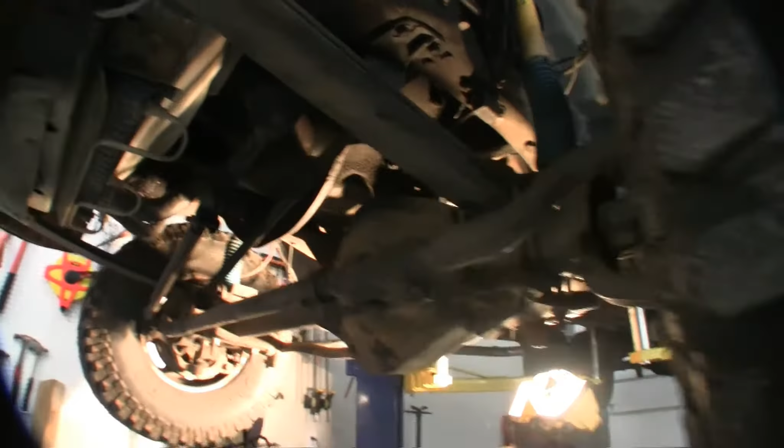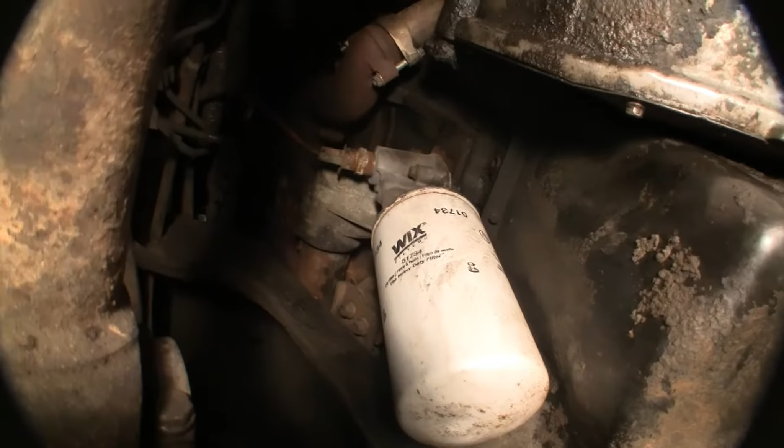I'm going to be changing out the oil cooler. Let's go around this way so we can see what we're doing. Get right up underneath here, and there is the end of your oil cooler. It comes in just above the engine block heater right here.

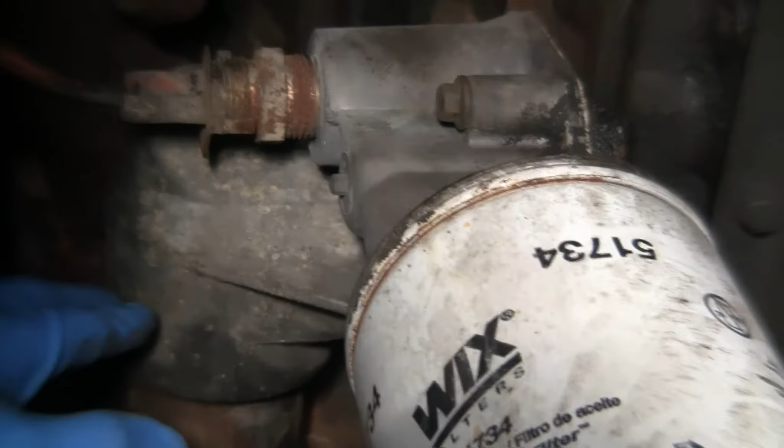Obviously, big old oil filter. I'm not going to change the oil today, it's just been done recently, so it's the same oil, but I'll take the filter off to get to it. This is the back end, the rear part of your oil cooler. Oil cooler is right here, all right? This thing's got about almost 200,000 miles on it, and I'm fairly certain it has never been changed.

If you go through the manual, the Ford manual, there is a way to test that for flow, see if there's any flow problems. But everything I've read about it, it definitely has flow problems by now, almost 200,000 miles. The small holes in there start to get occluded and kind of gummed up. It doesn't cool the oil properly.

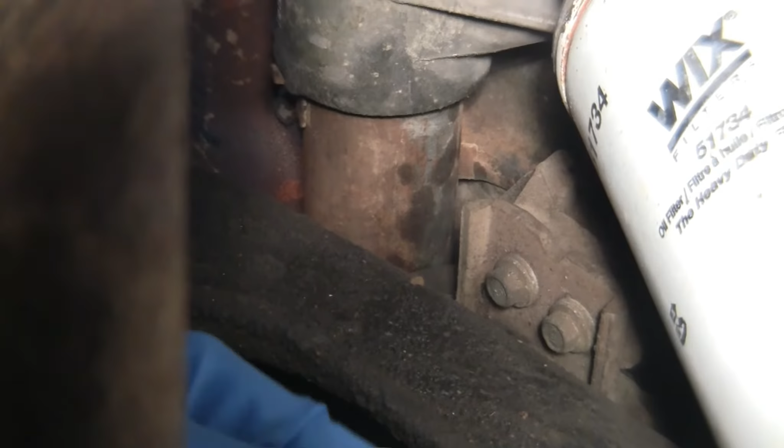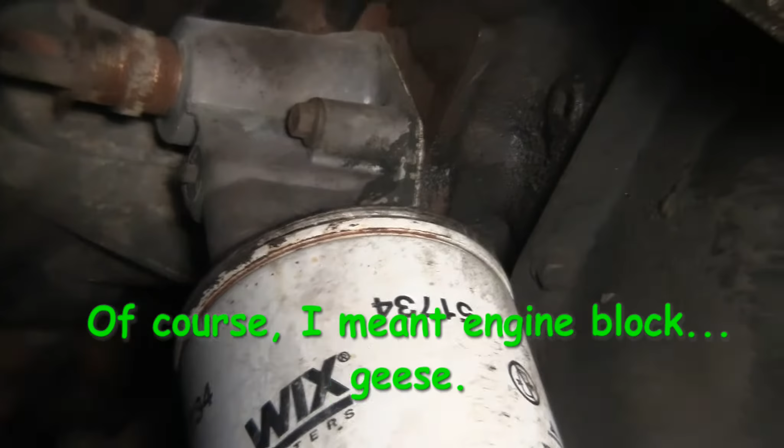You're going to have to take off here the connector for the oil filter. Right here behind the oil filter is your plug for your cylinder drain, to drain your engine block right there for your coolant. There's another one on the other side from where I am, and I'll show you.

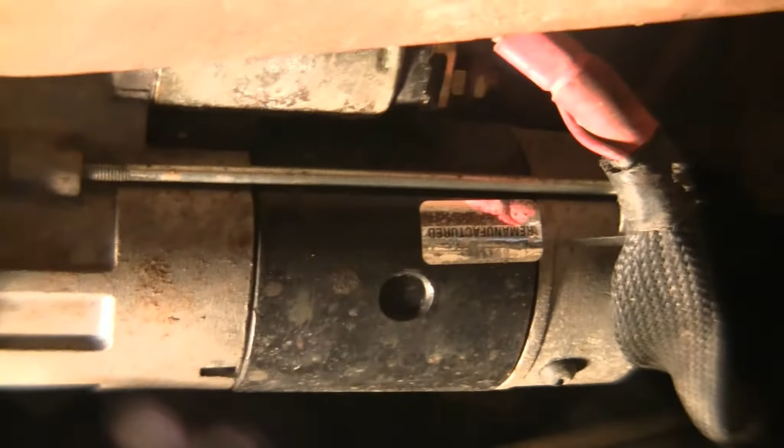Come around to this side of the car, and you can see here where the starter is up underneath here. The other, the passenger side drain plug is just up and above the starter. I think you can reach it if you come over the top.

I've already got it up on the lift, so I'm just going to leave it. I've seen several people online who did this by only draining the engine block on the driver's side and then taking it off. The Ford manual recommends that you come up here.

It's more towards the front part of the truck here. And if you can see this, you've got a drain plug. Whoops, sorry, it's kind of right behind that, isn't it? Let's come around here a little bit. You've got a drain plug right here for your radiator.

Ford recommends draining the whole thing. It's been a while since I've changed the coolant in this truck, so I'm going to go ahead and drain all the coolant, toss it, and refill it. By draining there in the back, on the engine block, there should be enough coolant out of the way to be able to do this without any problems.

Now the Ford manual makes this thing sound easy. It just says unhook the back, unhook the front, pull it off, put a new one back on. You can probably do this in maybe 30 minutes if you really get everything together and come and do it.

A couple of things. Go back around here to the front, let me show you. I do mention this later on in the video, but go ahead and take this lower hose off here. It makes it so much easier. Pop that and off you come.

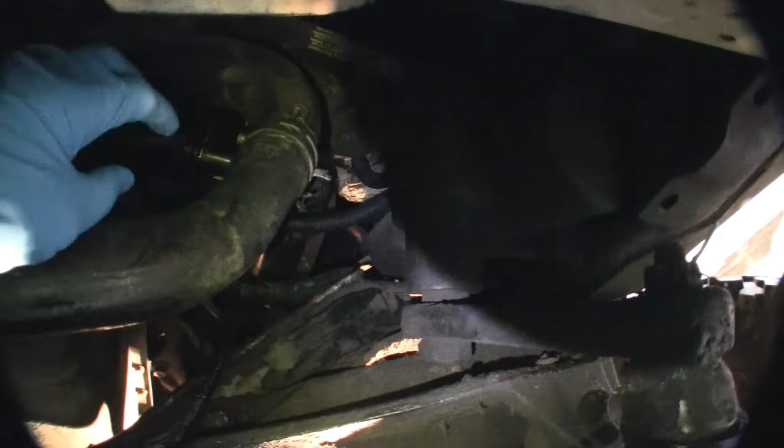Now this bolt is the key to getting it back on. Make that the last bolt you take off. Okay, you have a lot more trouble getting the top bolt out. It kind of gets a kink, sort of gets cockeyed, and it kind of splints against the bolt, makes it hard to get it out on the top. So take your top one out first.

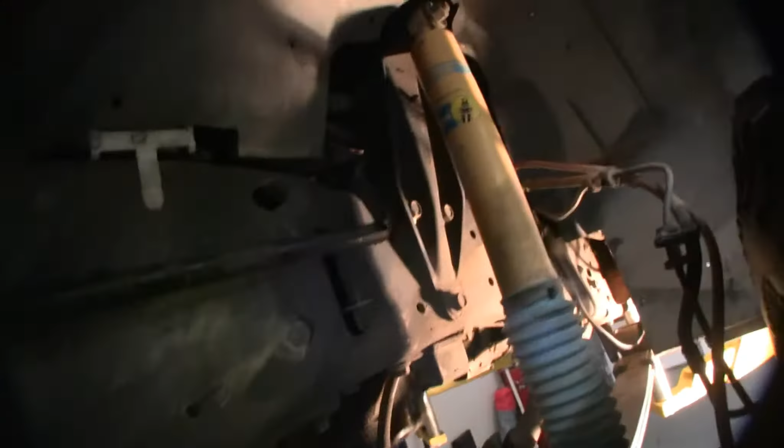The other thing is, go through, look on the other side, go through right here, get your top bolt. So much easier. You need a long extension, but it'll save you tons of time. Just go right through there, bam, it's right off.

Okay, the other thing, once you have your oil cooler out and you're working on it on the table like we were over here, you'll see on the video I use this for putting the oil cooler back together. I did one thing first that did not work.

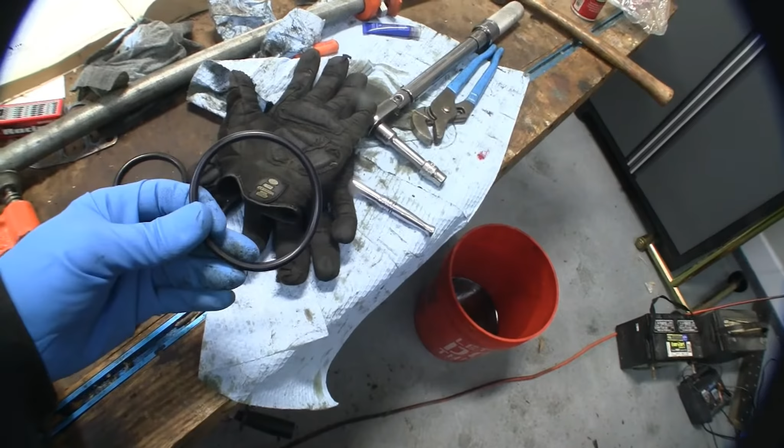Do not put the smaller black O-rings inside first. I tried putting those inside of the ends, sliding the oil cooler in on top of them with the large green ones already on the cooler. It doesn't work. They catch and they just won't slide for whatever reason.

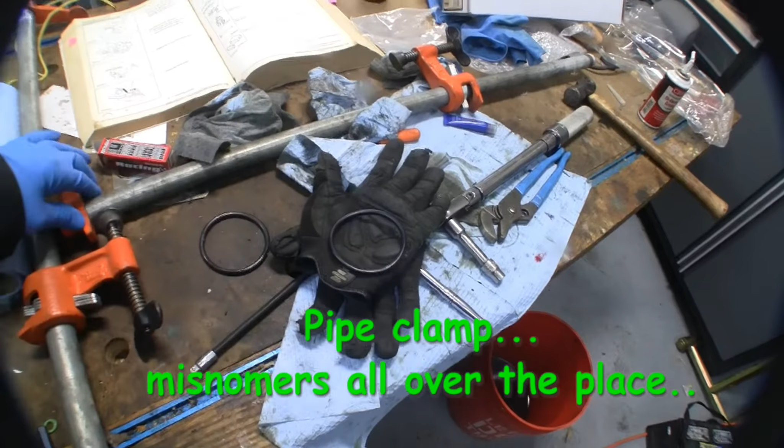Put both of these onto the oil cooler itself and then slide them in. It still takes quite a bit of pressure. I found that using a pipe clamp like this slid right together, no worries. I think that's about it. You do those couple of things and I think you'll see it go a lot quicker and a lot smoother.

Here's a quick picture of the shop manual I'm using, straight from Ford. I also have it on disc, but I've got this out here today. I'd recommend anytime you're working on a car, go online and check out what everybody else has done too, and take information from that. YouTube is a great place, obviously where you're looking today. But I'd recommend, if you can, get a hold of the actual manuals from the manufacturer. This is a Ford shop manual, a little bit used, a little bit older. Again, a good eBay buy here too.

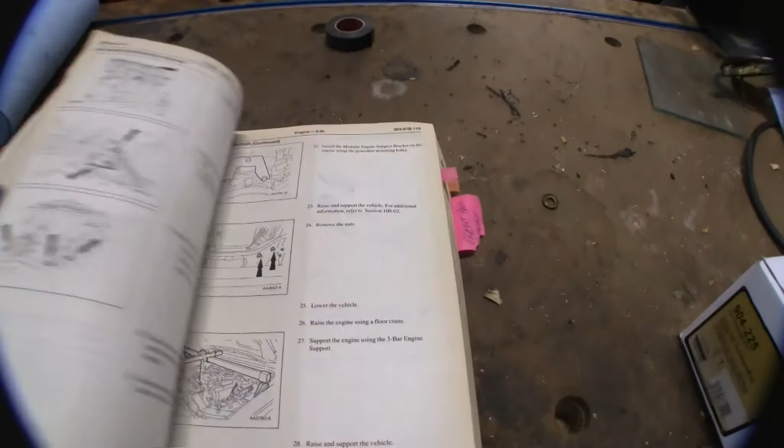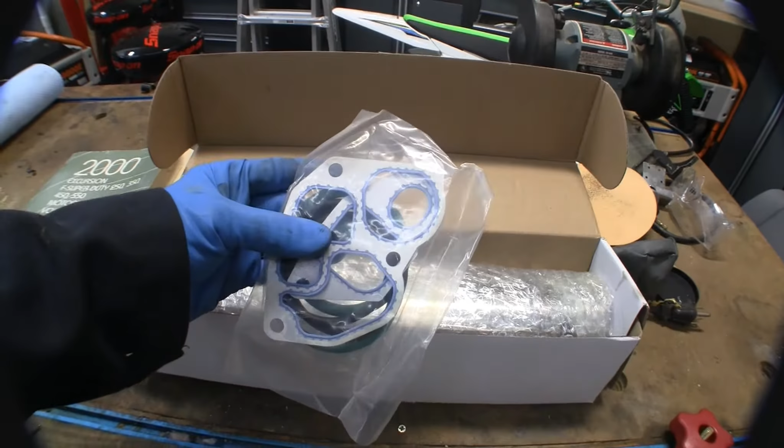We're going to open up and go to the oil cooler on this. Here's the parts we're going to be putting on today. This is a kit that I got from Rock Auto. You've got your new seals, you've got your new gaskets, right here. Then you have the oil cooler itself. I'm just opening this thing up, I haven't even taken it apart yet.

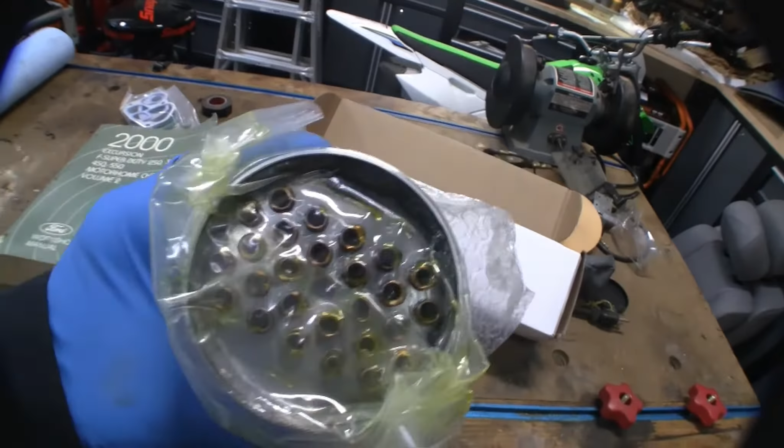Here's your oil cooler, and here's why you have trouble with it. Look down in there, my oil cooler has got almost 200,000 miles on it, never been changed. So I'm guessing some of those holes are not quite as patent as they used to be. I think I mentioned this before, there's a process in here for checking your current one - pull it off and do a pressure test on it. At 200,000 miles, I don't see any reason to do that. I'm just going to replace it. I've already got to take it off anyway. So this is what we're going to be looking at.

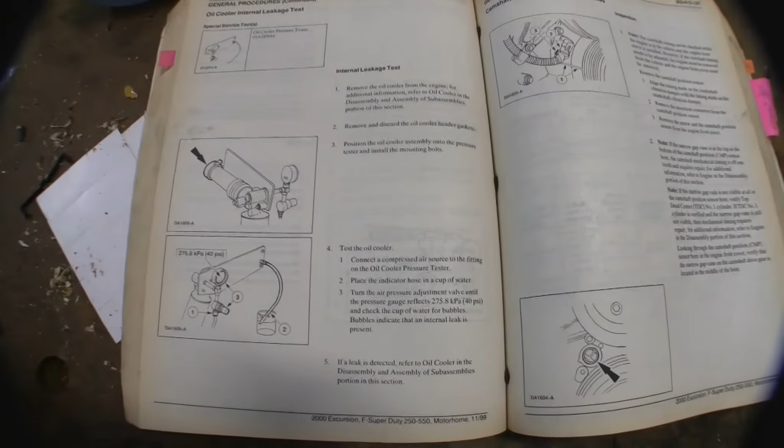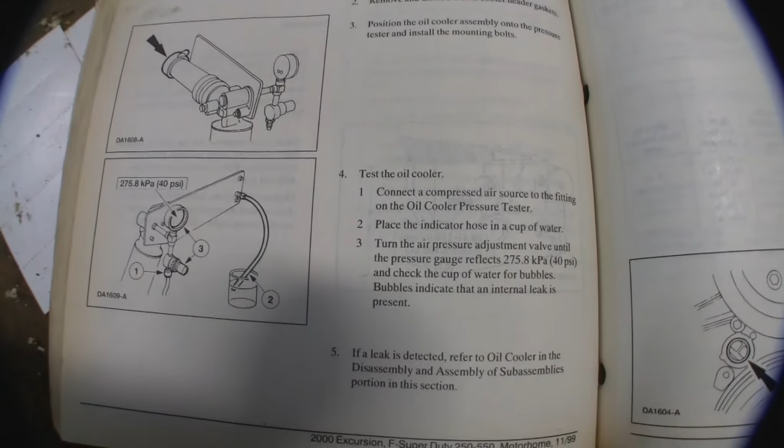Let's see if you guys can see that. It's kind of hard. Any of you who want to do the internal leakage test on your oil cooler, I'm not going to go through it, but there's how it's done. You're going to freeze frame that and read it. It's pretty short instructions on how to do it and how to check it.

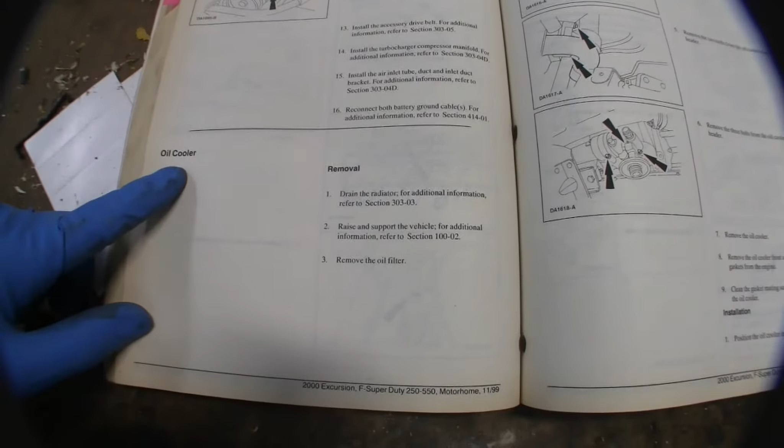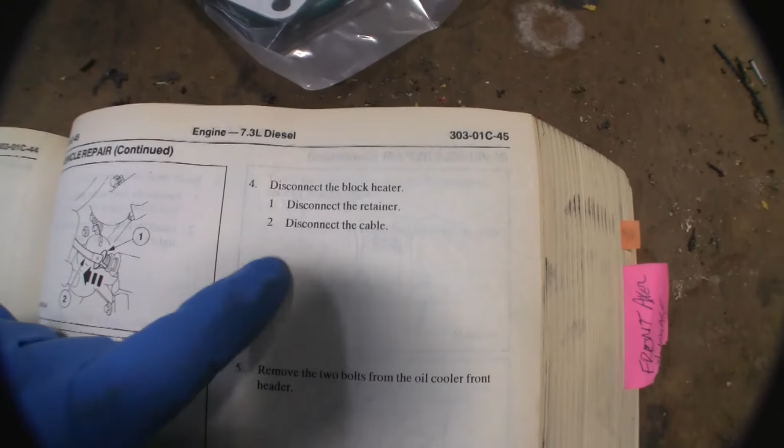So here's what the manual has to say about it. See the oil cooler up here. Hopefully it's as simple as they make it out to be. Drain. All right, what does it say? Take out the block heater, undo the bolts, and off it comes. It's never that easy. So we'll get in here and see if we can get this thing off, but it's never that easy. And then you install it.

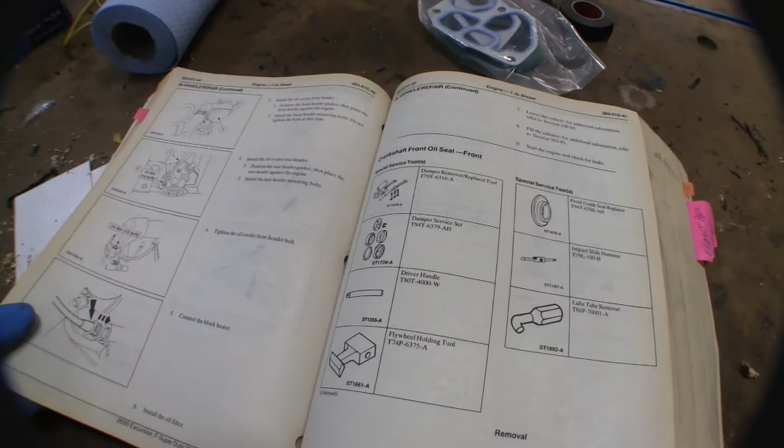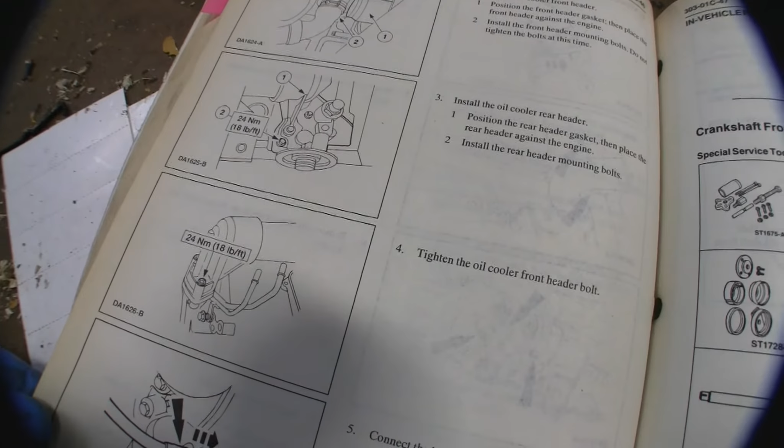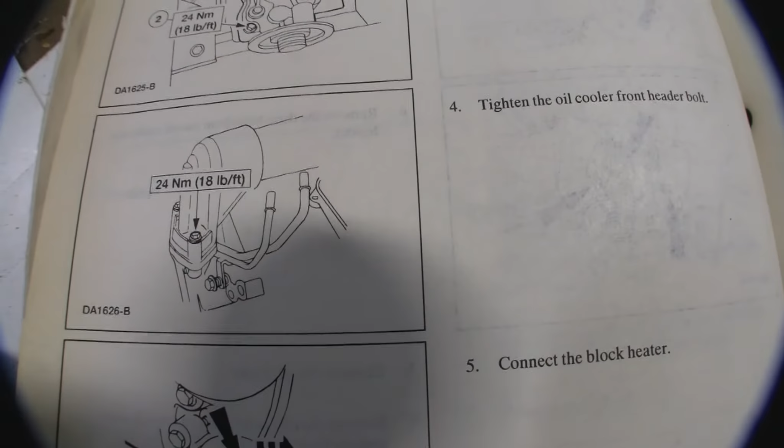I'm going to give you guys the torques here, the tightening torques for the rear header of the oil cooler that also contains the oil filter. Right there you can see is 24 Newton meters, just while we're at it. 24 Newton meters on the front as well, for your tightening torques for those bolts.

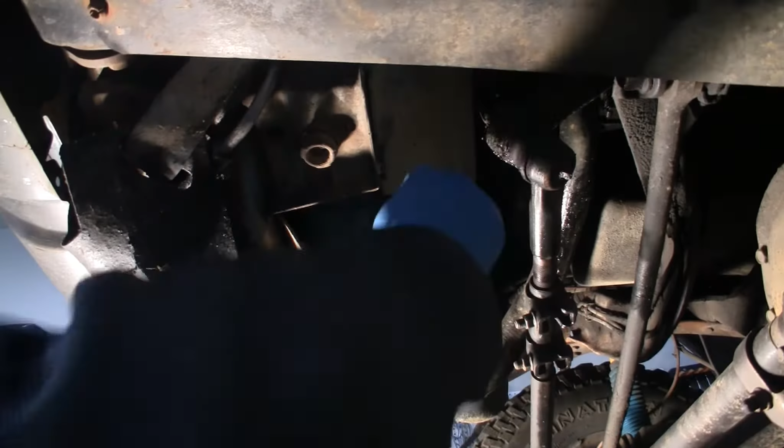So we're underneath the driver's side front. This is your drain for your radiator right here. I'm going to take the fluid out. 19 millimeter wrench, fits it perfectly. All right, and we just do a little loosening them up in here. I got a 5-gallon bucket ready to go down here. And we're just going to get some radiator fluid, get some coolant out of here. How about it? Oh, how about that? I guess we're going to be replacing our coolant drain plug. That's a fine how do you do. How about that?

Huh, well, it's got an internal - see that? Wait, where? It's got an internal on it. This is just to show you sometimes things don't go the way you want them to go. It's been on there way too many years, I'm guessing. I haven't drained it in years, and it looks like it didn't want to work with me.

So I'm going to get a hex to go in the center of that, and we'll fix it up. Okay, see if we can get this up in here. Here we go, so my little plug broke off. An 8 millimeter hex does fit into it, so we're going to use that to get the plug undone. And I'll just go back later and replace the plug. Honestly, the fluid doesn't look too bad, it looks pretty clean. But I'm still going to go ahead and replace it since I'm at it anyway.

There's a few things that you can do. Let's see if this works for us. Alrighty, let that drain for a bit, and we'll move on.

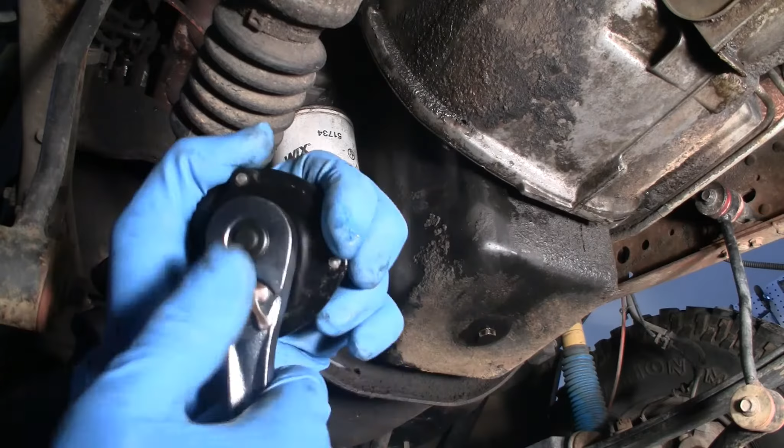Alright, so get hold of the oil filter and get it off. Right here, can you see this little bad boy? There he is. Great little tool, let me show you. Okay, just fixed into a 3/8 ratchet. Alright, great way to get them off. This is about the biggest oil filter this thing will fit, but great little gizmo here. Be sure that you're not twisting so hard that you put any dents into it, okay?

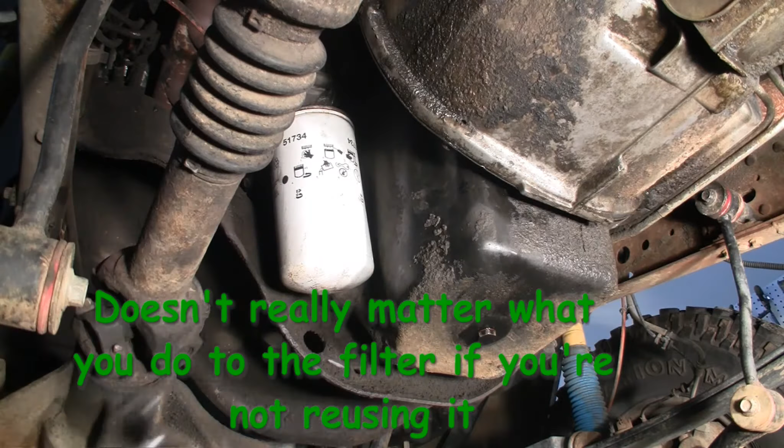Scraping a little paint here on the edges, no big deal. Just don't dent it. Try to get it off.

I've had a little change of heart here. They didn't say that you had to actually change all the oil, just top it off after you pull the filter off and put it back on. But my oil coming out of there looks like crap, so I'm going to go ahead, and while we're messing with this, I'm just going to change it all out.

You can see it's a pretty dark color, even though it hasn't been that long. I am a little rough on it, maybe that's what's happened to it. So I'm going to go ahead and make this an oil change as well, and we'll worry about that a little later on. But see the color of the oil, if that comes out like that, you might want to go ahead and just say, hey, time to change them out.

Alrighty, just spin it off. I like wearing these rubber gloves when I'm doing this kind of work as opposed to my leather gloves. I've got some other gloves that are made for working with oils and solvents and things like that, but these cheap throwaways actually tend to work better than just about anything.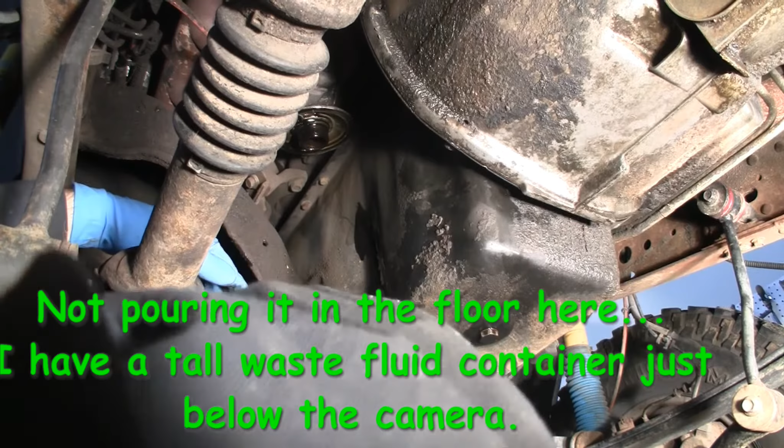Yeah, that oil's coming out looking pretty darn nasty. So I'm going to go with an oil change on this bad boy. Alright.

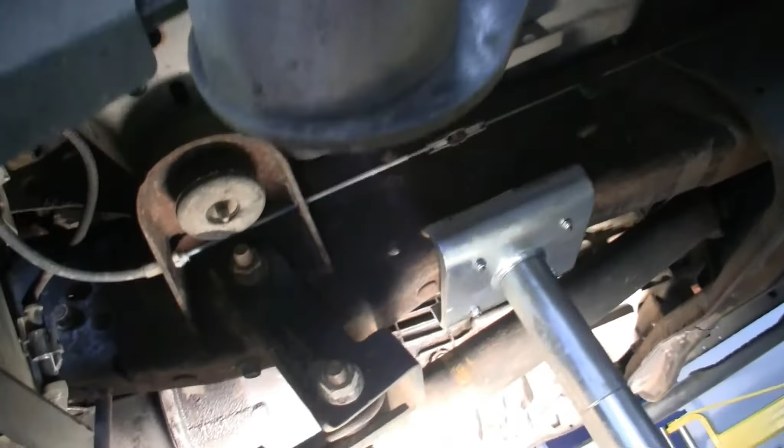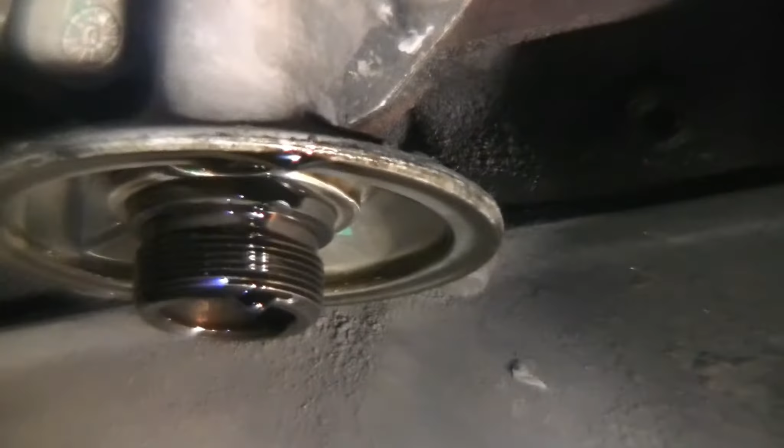Okay, so when you come around to the side, this is the driver's side of the truck. There is a drain for the cylinder block. Right behind where the oil filter comes off, there's two plugs. The top one, the smaller one, is the one that you want. There's one very similar on the other side, but I'm not going to worry with that one.

Okay, so you can see the two bolts, two plugs. All it takes is a 1/4 inch drive right up inside of it. I hope that's all it takes. A little bit of elbow grease and it'll start moving for you.

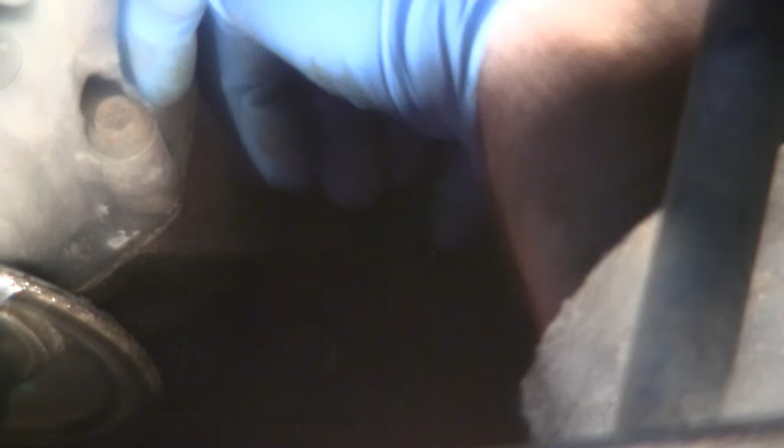I'm not sure exactly how much we're going to get out of this, so I'm going to start going pretty slow first till I figure it out. I know my hand's in the way of the camera, but that's the only way to get this done without having fluid everywhere.

Not too much coming out. Try to dry it off up here a little bit, and of course it's going to keep coming out. Just try not to shove any dirt back into it.

Okay, I'm going to coat it with a little bit of red thread locker. I like the gel stuff, it sticks a little better. You can tell by looking at this plug, it had red on it, I'm guessing for mine from the factory. It's like nobody's touched this thing in forever.

Another little tidbit I'll share with you. Not only am I Dr. Shankopotamus, but I'm actually a doctor. Don't just play one on TV.

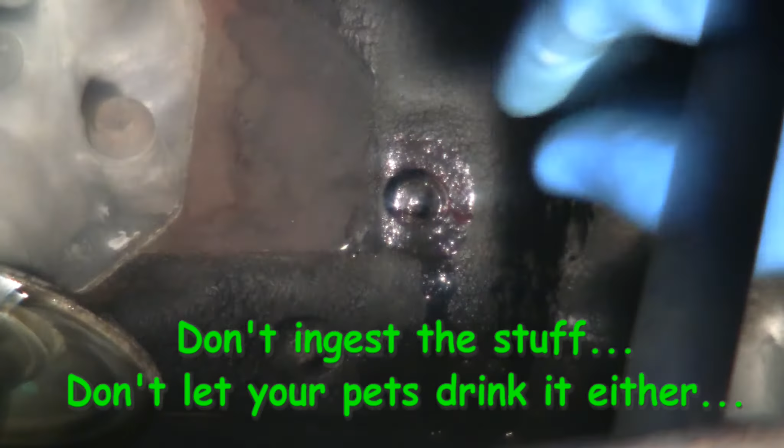So, this fluid coming out of here, you should go right back in, can be very, very harmful. Okay, it splashes around, gets onto your face at all, do not let this stuff into your mouth. If it's around your mouth, go wash your face off immediately. It does not take much of this coolant to actually cause a poisoning.

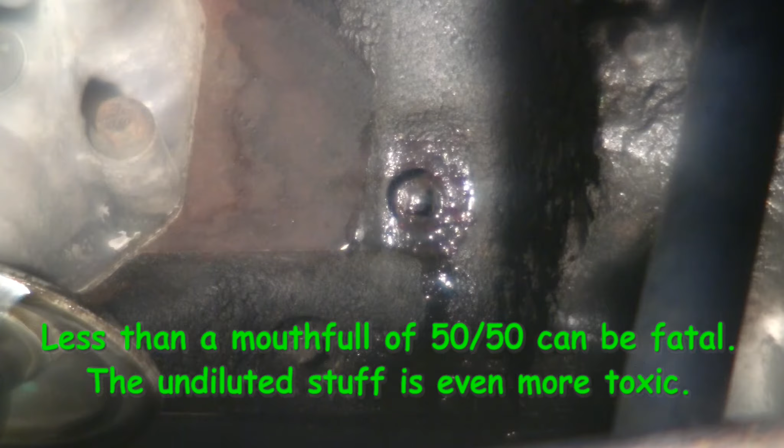Okay, I've had patients who accidentally drank it because they put it in a Mellow Yellow bottle. I don't know how that happens, but it does. But just a public service announcement, be really careful with this stuff.

Also, if you don't dispose of it immediately or soon thereafter, be sure you cover your bucket. Okay, you put it in an open bucket and you've got pets or neighborhood pets anywhere, I don't recommend you try it, but the stuff tastes very sweet. Ethylene glycol, okay? Glycol, glycogen, sugar, tastes sweet. Dogs, cats, whatever will lick this stuff up and they will be dead before you know it. So don't ever leave this stuff sitting out open. Don't ever let it get on your face. If it does, wash it off immediately. If you've got an open container before you can take it to a recycle place, cover it. All right?

Okay, so you'll see on this block heater, there's a little retaining clip right here. So I got these bolts loosened up here. It said 10 millimeter. I put it on a 1/2 inch drive just to break them loose, because I really don't think they've been off in almost 200,000 miles.

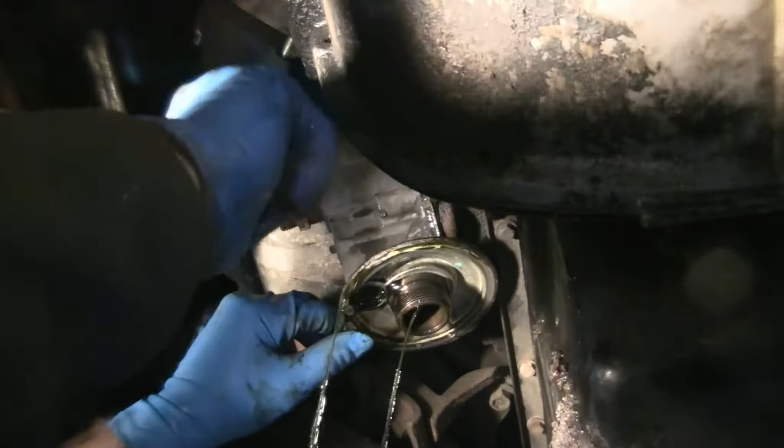So get these on off the rest of the way, and then we're golden. So we've got it loosened up, and still getting quite a bit of coolant coming out from behind it, as you can see.

Our back end is off now, so we'll head to the front.

According to the manual, you don't have to take this coolant hose off. I mentioned I thought I might, but now I've got good light up underneath here. I think it's possible to get right to it.

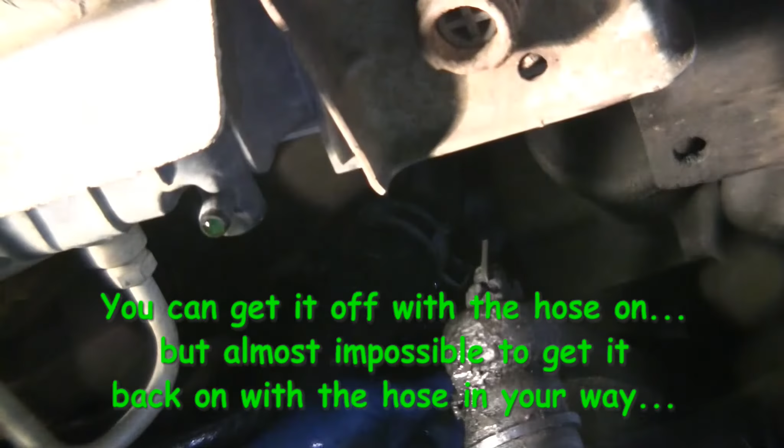Let me see if I can show you guys. Yeah, I think I can get it here with a little extension. Let me show you what I'm talking about. Bring the camera around just a little bit — I know it's a little jumpy. Flip this over to give you a better view of what I'm looking at. See right there, there's the hose.

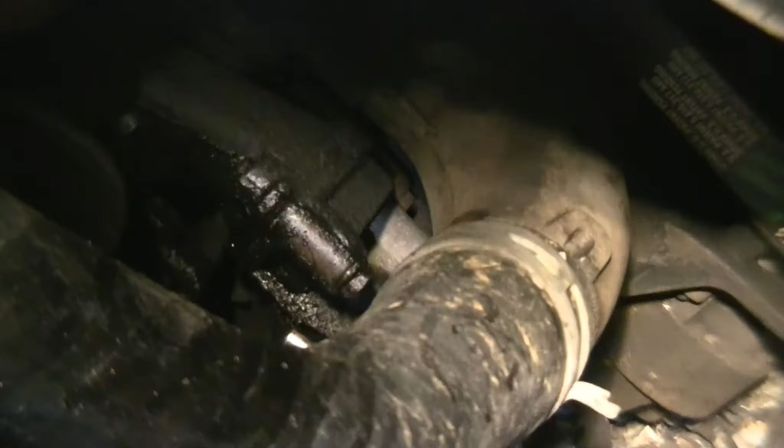I thought I'd have to take it off, but I can actually get to that pretty easily coming around the back. Right there, you can see me coming across, another one up top, and you can get a little extension, a little angle on it. So I'm going to leave that hose on and give this a try.

Once you're disconnected, clean it off, slide off the back. I'm going to go ahead and go for it.

All right, so we're back at the bench now. Got our oil cooler out. Bring a little oil back there, that's good.

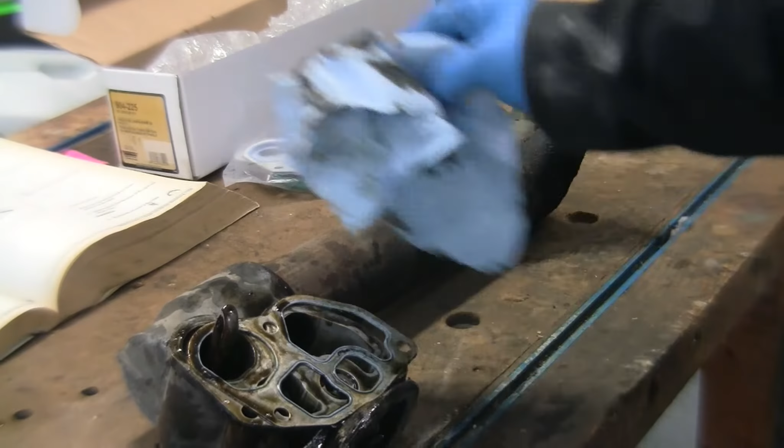Couple of things — I watched a couple YouTube videos, and several guys took it off like I did, from the back first and then the front. The shop manual says to take off the front first.

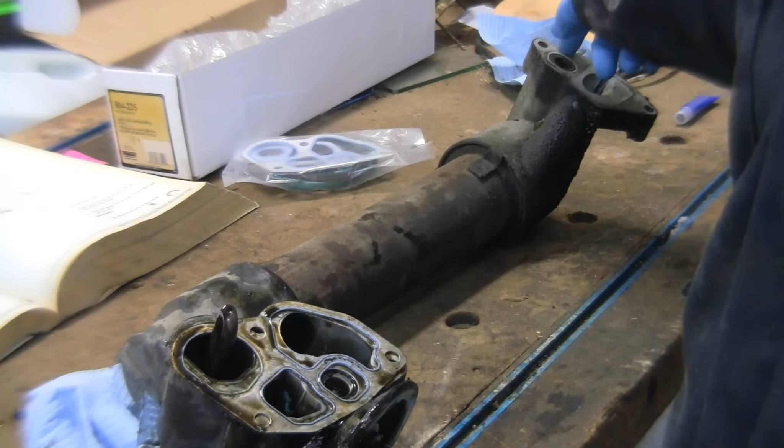I'll tell you the way that it sits, if you take off the back first, be sure you take off the top bolt first, because when this thing starts to rock a little bit from the weight, it pinches that bolt and it just never loosens up. It's really hard to get it out the rest of the way.

My recommendation after doing this once would be just go by what the manual says — start with the front off first, you get easier access to the back, and then you're out.

Another thing about this — these gaskets are metal, firm gaskets, rubber lined. You can tell from the factory, like this one, there's nothing between the gasket and the engine, or between the gasket and the adapters for the oil coolers. So don't go putting a bunch of gasket maker on top of these things — you'll mess them up. They're made to be used without any kind of gasket maker on top of them.

The shop manual verifies that — they don't say anything about putting any kind of gasket material on them. Just clean everything real well. It also makes it easy to clean — you don't have to go in there and scrape a bunch of crap off of your engine and your oil cooler.

So I'm going to go ahead and knock this thing off, get this apart, clean it up a little bit, put it back together. We're good to go.

All right, so the front end is off. Comes off pretty easy, just a little light tap with a hammer. Obviously, you don't want to smack it too hard — you don't want to damage anything.

You'll see the O-ring down inside of there. The kit comes with a replacement O-ring.

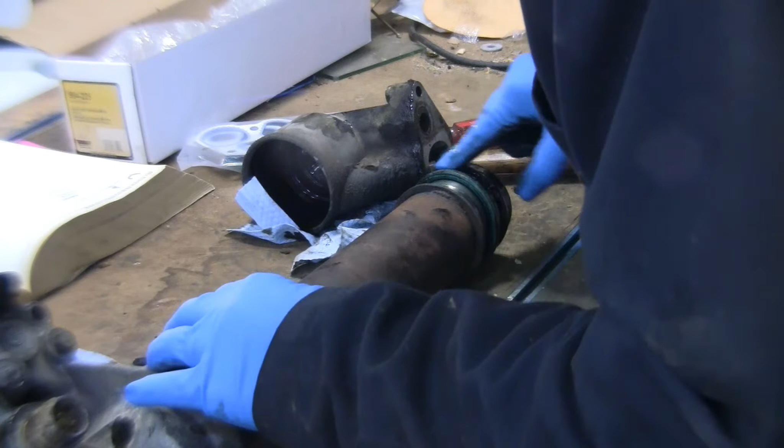Going to try to clean all this off. Clean all this off — I could care less about this. So we get all this cleaned out, get any kind of gunk out of it.

Try to prevent dirt from getting into it. Probably going to take this to the sink over there and scrub this thing too, just to get some of this crap off the outside of it, so it doesn't end up back in my tube here. Same thing with the other end. Let me get this one off, and we're golden.

Here's another thing that comes in really handy — if you don't have one, I'd recommend getting one. That's a scraper. It's just a metal tool, almost like a screwdriver. I've got a few extra blades in the back here.

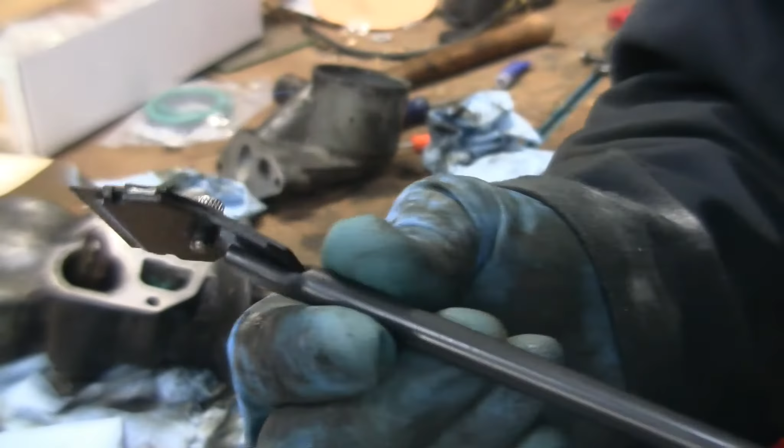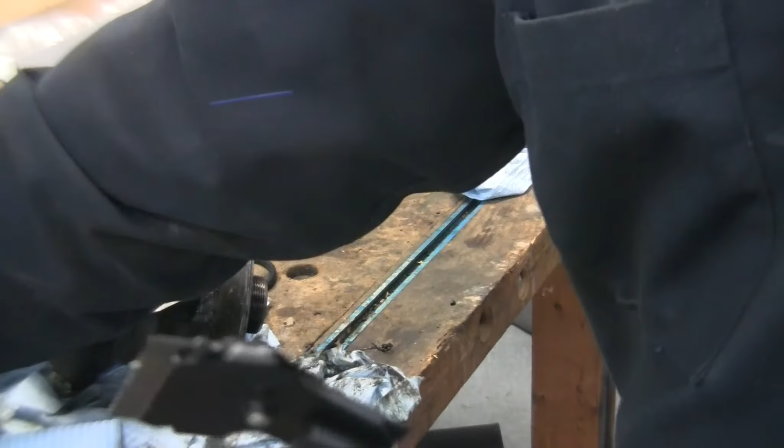It's got a long bend so you get a little bit of an angle on it, a little bit of power, just for scraping off the leftover gasket material. In this case, there's very little. Like I mentioned before, they're metal — metal with a little plastic on the inside of them, the plastic rims around the inside.

But on the rear connection to the block, there was some of the plastic still stuck there. This thing takes it right off. Anyway, good little tool to have.

Okay, so here we've got the O-rings. There are two sizes — this black one, and a little bit larger one that is the green one, and you'll see when you take them off, the black goes...

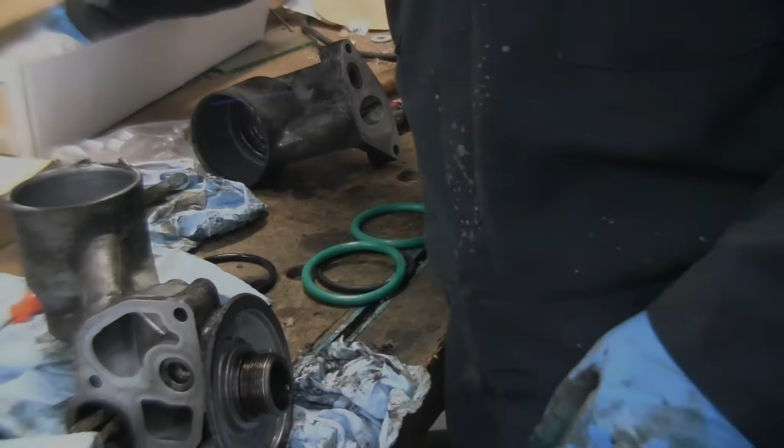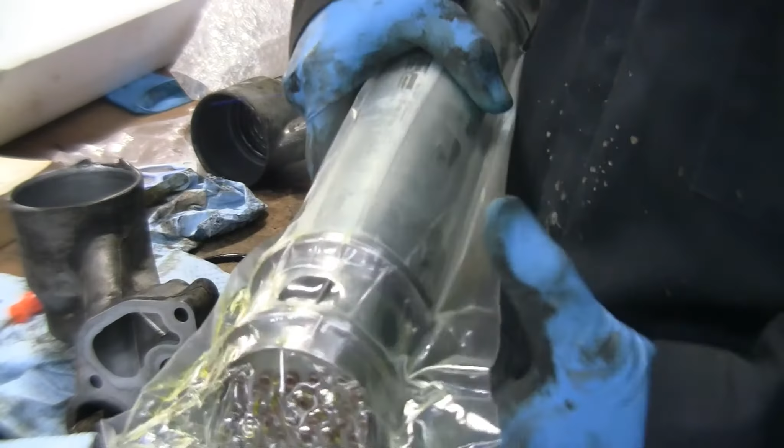I have my new cooler right here. You can tell when you take the cooler out — when you pull the cooler out, get this — it's got openings here and openings here for the flow, right? Be sure it's got little tabs. The one that I took off has a little bigger tab, but this still gives you a location.

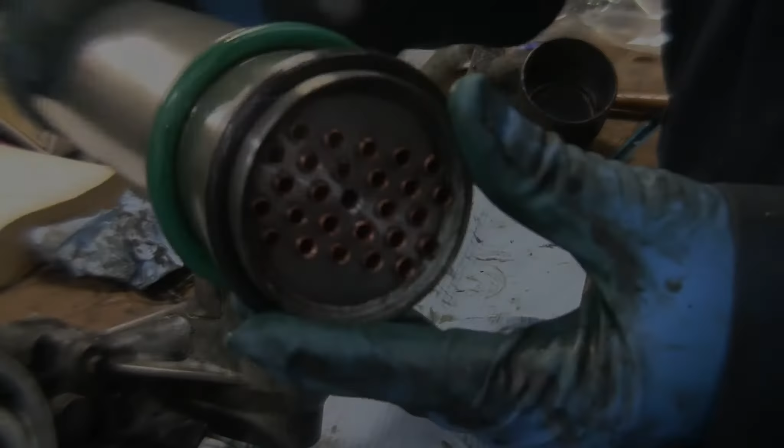So the O-rings are on there. Let's get the other end.

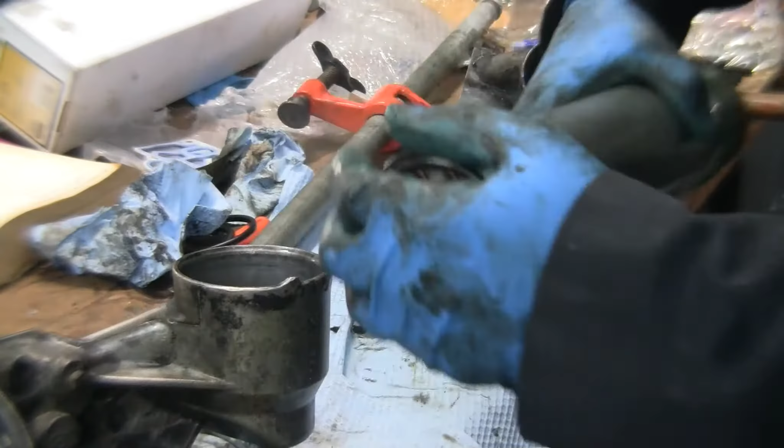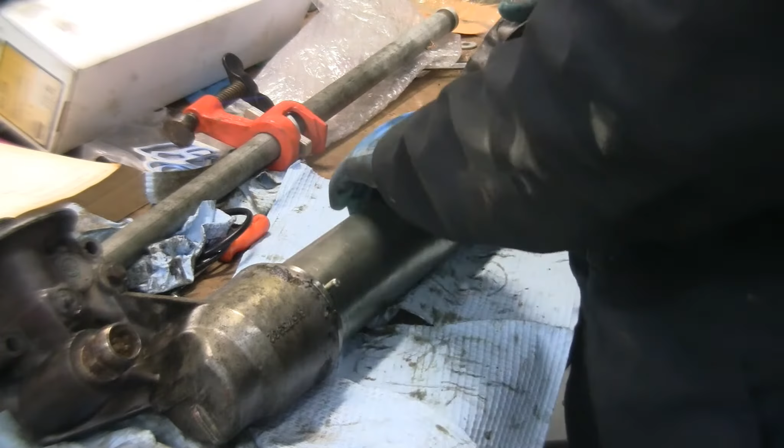You want to line them up with the notch on here, and the little bar on here, and we're going to put them together. Might be a little hard to push them together. I've got some clamps I'm going to try to use to pull them together once I get the ends on. But I tell you, the fit is very tight.

Maybe in the past it's been a shop press or something they've used to push these together. If you've got one, I think you probably could, being very careful with it. However, this clamp works just fine. So that's what you're going to want to do.

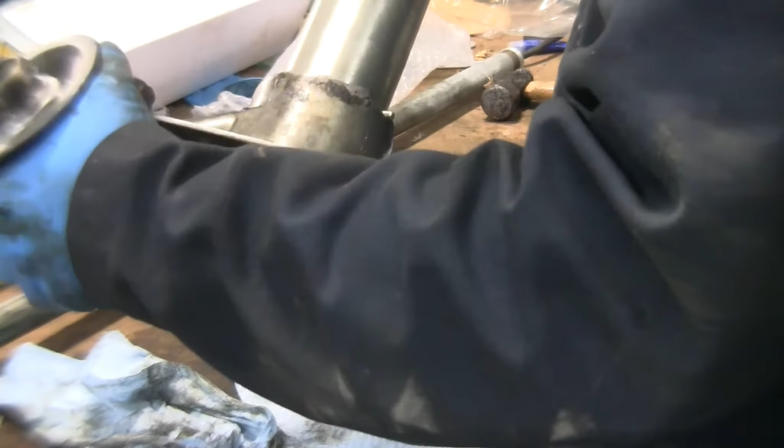And once they're seated, voila. As you need to, you can turn this one just a little bit to get it to line up, so it'll turn a little bit. And there it is.

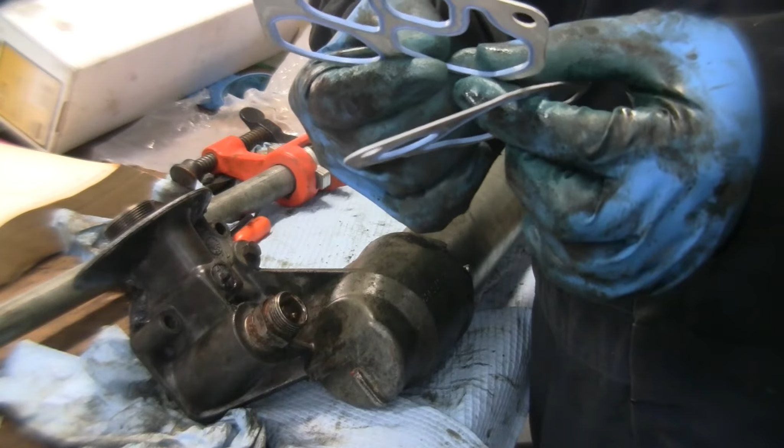Ready to mount. Now we'll put the gaskets on there first. Remember I said they're metal, they've got a rubber insert in them to form the gasket. Do not put gasket maker and rubbery crap on these things, plus it'll get into your system and then you'll have a mess.

But I'm going to get these back on. You saw where it came off. I don't know if I'm going to put everything back on, but I'm going to get these back on. You hook up the front, then you hook in the back. Don't tighten everything down yet. Once you've got the front and the back in, then torque it all down. I showed you what the torques were: 24 Newton meters on the front, and 24 Newton meters on the back.

Just cleaning these bolts off that secure your oil cooler to the cylinder block. A couple of the ones in the front had oil all up and down the shaft of the screw, and that just tells me that's where my oil leak that I saw in the front was coming from, right around here.

Just like I did before, I'll take these and put a little dab of my red thread lock, the one in the blue package. I'm not sure how that works, but that's how it works. Put some of that on the end of these and get my gaskets in.

So you can see once you get it in, it lines up here. Here's the intake, and then once we're in this hole up here, we're golden.

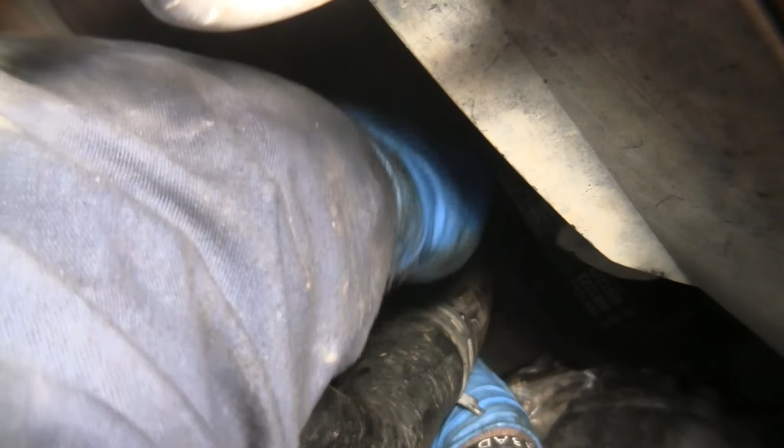I'm going to say yes to taking this off. Getting this clamp out of your way, it's just going to be so much easier to get this thing back on. I'm going to drop that down. We'll see how much easier it is.

All right, I'm going to say yes to taking that off. Hopefully you guys watched this all the way through, got started, saw some of my mistakes and hardships and pain in the fannies, but now being able to reach and work in that area, I'd say you could even take off this negative ground right here if you wanted to. And if I have any more trouble, that's the next thing I'll pop off so I can actually get to this thing easily. No reason to make life harder and harder on yourself.

Go up underneath here. Yeah, I think I can actually get to it now much easier than I was before. Yeah.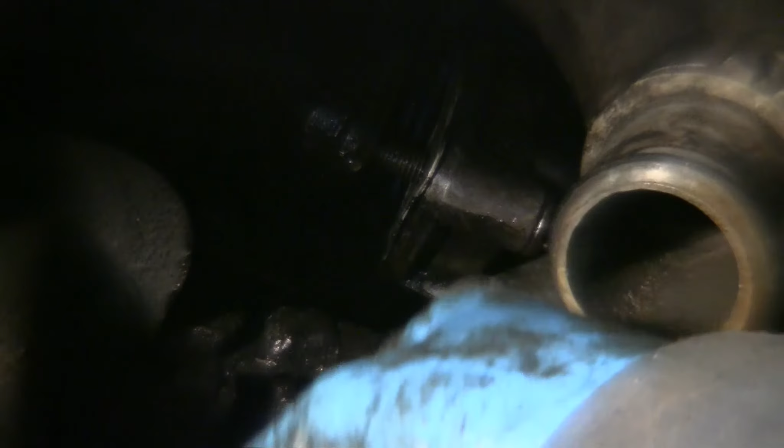All right, hopefully this will save y'all some time. After fiddling with this thing front and back, back and front, probably the two things - I lowered the truck just a little bit to get my hands up in there. But finally figured out this is your pivotal screw, the lower screw in the front. When you start to mess with trying to raise it and lower it and make it fit, that's the only screw that easily fits without the oil cooler itself lined up properly.

So once you have that one in, we're going to tighten it on down just a little bit, not completely tight. Make sure you have your top screw and your gasket in place, it's going to be hard to get it in if you don't. Then we'll head to the back, lift up the back, get one screw in to secure that, come back to the front. So everything should go together.

But this - where is it? This, that's the screw you want, the lower front screw, if you're doing it by yourself. Best thing would be to have somebody in the back helping you lift it up, straighten it out for you, hold it while you put the screws in. But anyway, hopefully that'll save you guys a lot of time because that took me a good 30 minutes to figure that out.

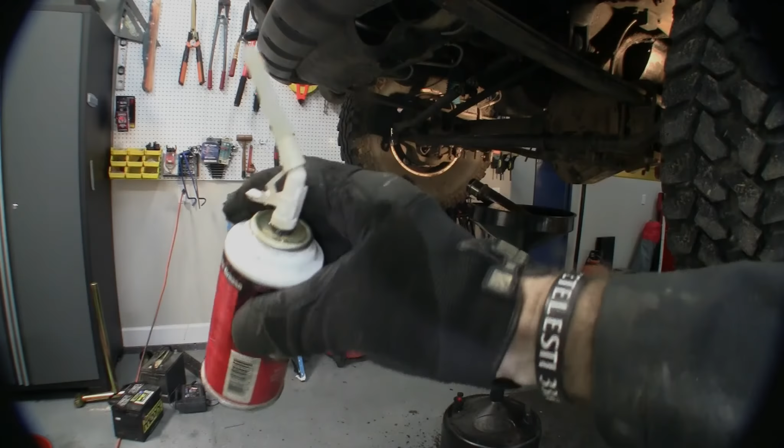Here's another thing to keep around the shop: dielectric grease. Finally got it back together, it's on there, it worked, it's torqued down, it's all good. But I'm going to put some of this in to kind of seal off the connection with the block heater up there. Just keep some handy.